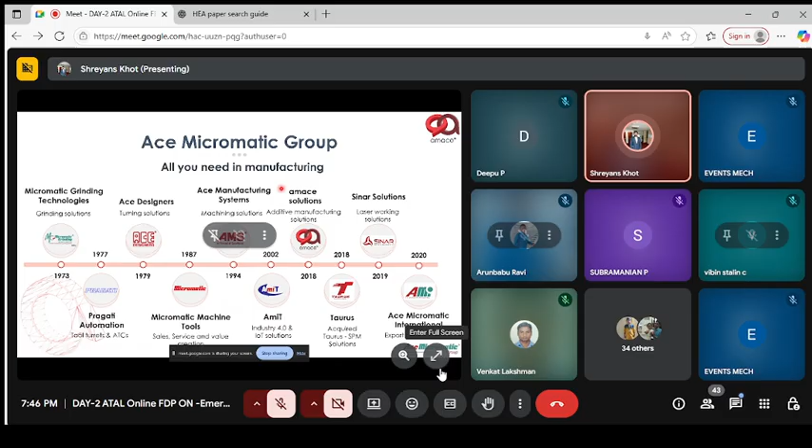In 2018, we started AMACE Solutions dedicated to making 3D printing machines. Apart from this, we have IoT and Industry 4.0 IT company, laser cutting machines, and special purpose machines - this is a glimpse of the ACE Micromatic Group, present for more than 4 decades. In 2018 we started AMACE, where two flagship companies, ACE Manufacturing System and ACE Designer, came together to form this additive manufacturing firm. In AMACE solutions, we offer end-to-end solutions starting from powder characterization, Make in India machines, printing of parts, post processing, heat treatment, and validation and certification of parts. This is our state-of-art facility in Bangalore and Pune.

So we will start with our presentation. I will give a quick introduction of this particular global AM market overview.

Everybody already knows about 3D printing, rapid prototyping, and so many other names for it. It's related to mechanical, computer, metallurgy, and chemical fields. But if we see all these things, all are covered in additive manufacturing, starting from software development, machine development, characterization - so many things are there.

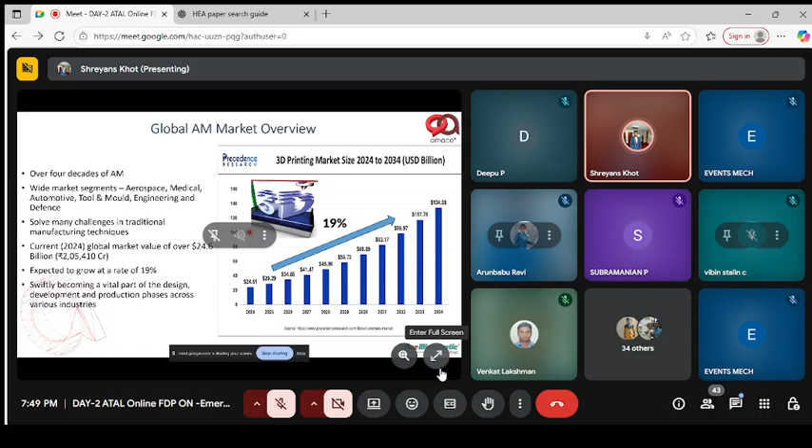So this is the current scenario in India. Currently the Indian market is close to 900 crore. But if you compare with the global market, it is very less - 0.1% or 1% of the global market.

So there's a huge demand, and everybody, starting from EV manufacturing, aerospace, space, everybody is changing for additive manufacturing. There is a huge scope for additive manufacturing. And as compared to global growth of 19%, we are growing in India at 18% year by year.

If you want to see where India is heading - there's a semiconductor industry booming, a battery industry booming, and if you see IoT and all these things, the next industry is metal 3D printing or the 3D printing industry, where everybody wants to print immediate products to take advantage of additive manufacturing.

And there are some government initiatives also started. The Ministry of Electronics and Information Technology has drafted a policy for promoting 3D printing for industrial grade as well as for education.

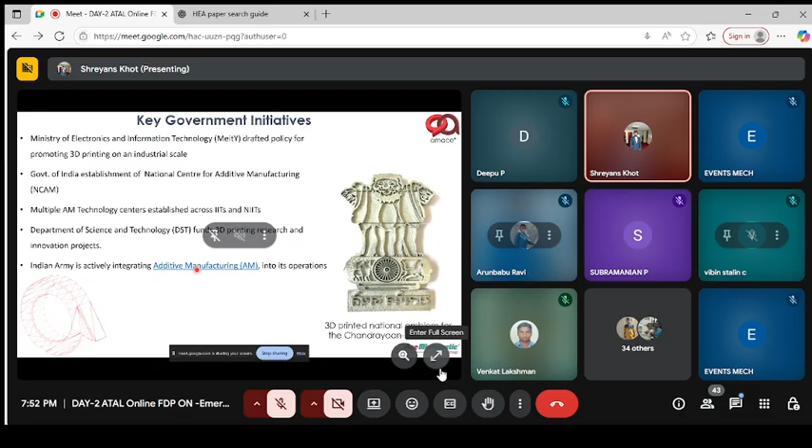So what exactly are they doing? They are doing reverse engineering of the CAD model, reverse engineering of the actual product, reverse engineering of the material itself - what are the current materials available in India, or what is the Russian grade - we are finding alternate solutions for these things. That is called reverse engineering of that particular part.

And then, everybody knows ISRO has collaborated with startups for 3D printing satellite components. If you take any startup companies like space companies - Bellatrix, Galactics, and Skyroot - almost 80 to 90% of their parts are 3D printed. And government also backed some incubator-nurtured startups developing 3D printed parts for launch vehicles.

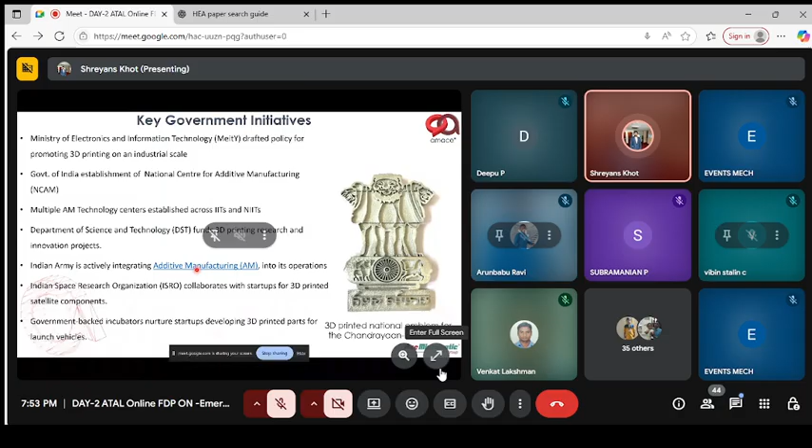So if you see, there are key government initiatives. And I will start with some basics of the current scenario of 3D printing - everybody knows all this additive manufacturing technology.

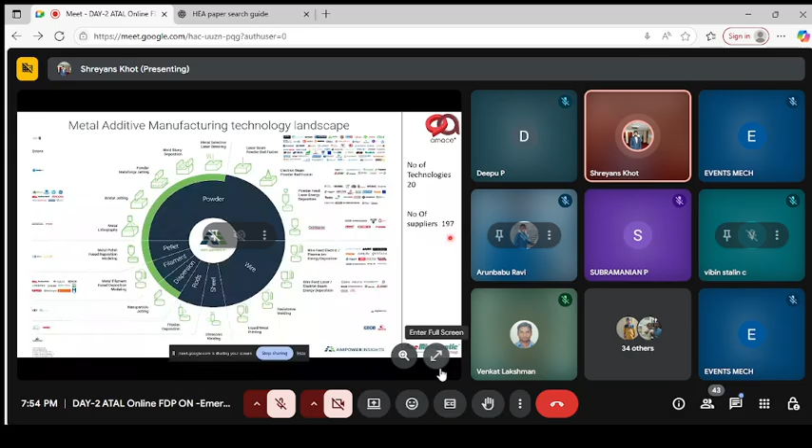Everybody knows powder bed technology, electron beam powder bed fusion, powder energy deposition, DED technology - there are around 20 technologies developed, though we commonly know only 7 to 8. Now industry is moving towards powder bed, wire bed, sheet bed, rods, dispersion, filament, and pellet extruders. More than 197 global machine tool manufacturers exist for metal additive manufacturing. This is the scenario of the metal additive manufacturing technology landscape.

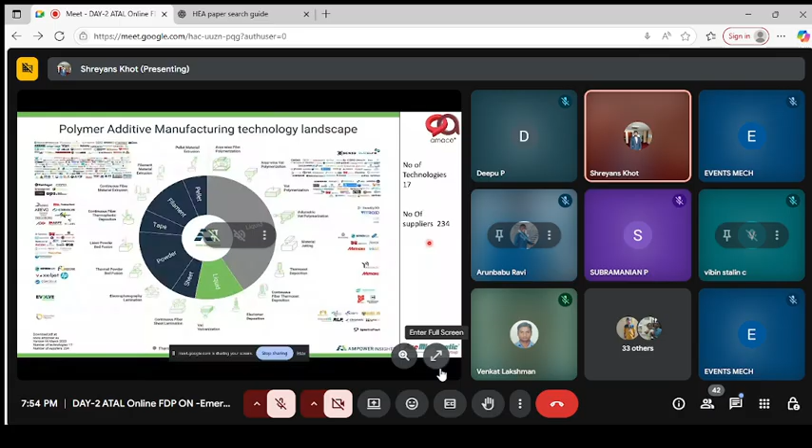For polymer, more than 17 different technologies are available for polymer additive manufacturing - I will share this presentation with you. More than 234 machine manufacturers are available for polymer. Similarly, for ceramic additive manufacturing, more than 12 technologies are available now.

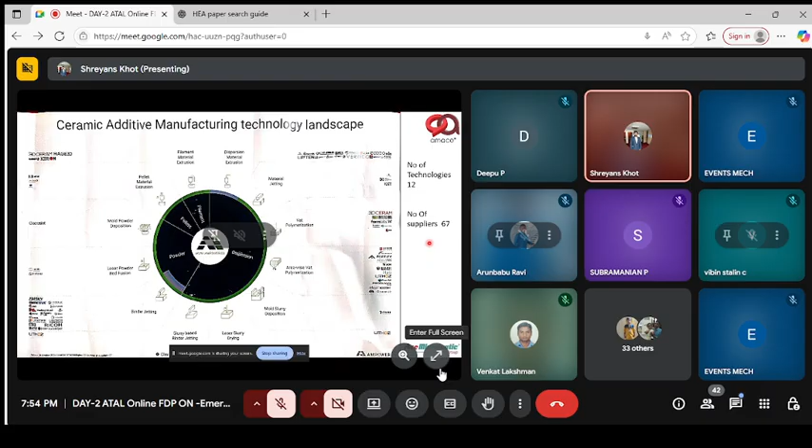I wanted to showcase the recent scenarios in additive manufacturing, and this is the current process chain. Starting with initial engineering and software, you look for the opportunity of where engineering and software fits - can I do CAD modeling or 3D printing?

There are simulation requirements too. So many softwares are available for additive manufacturing simulations, like Simufact, ANSYS, Ntopology.

What are the current designs available? Can we put lattice structures that are best suitable for additive manufacturing? There is also design for additive manufacturing - I have purposefully kept two slides for design for additive manufacturing.

This is the last slide, where I will interact with all of you, the students - what is your understanding of additive manufacturing?

If you start with engineering and software, then it comes to material - definitely powder and wires are required. What material and powders are required? Some powder manufacturing is required. What powder characterizations are required? Some metallurgical and chemical analysis are required here. Where the current material doesn't match the application, how can I chemically tweak this material so it becomes best suitable for end applications?

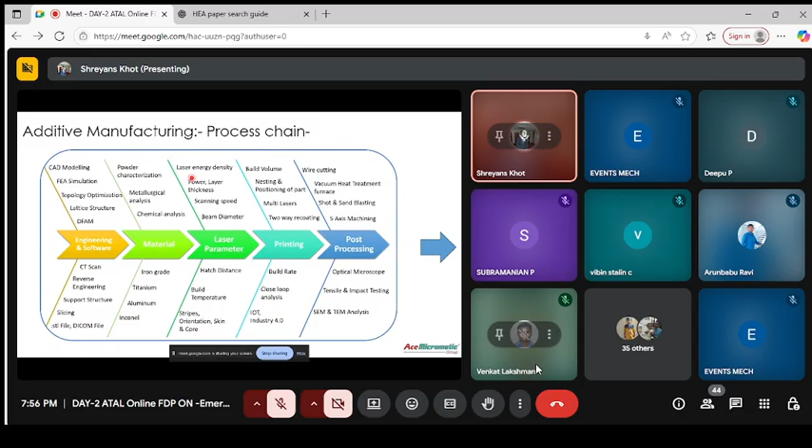And definitely this is the core subject - laser process parameters. I'm talking about powder bed technology, the most popular technology in the world and in India, where you have to play with laser energy density, power, layer thickness, scanning speed, beam diameter - apart from this is the laser parameter. More than 230 process parameters are available, and we can play with these process parameters.

By playing with this process parameter, how can I melt that particular alloy? To be frank, all weldable material available in this universe can be 3D printed. Currently, the basket is almost close to 70 to 80 materials. Someone has written that high entropy alloys are also possible - if we play with laser energy density, it's basic physics. We have to weld that particular powder, melt it, and produce a part. So we have to do all these things.

Second thing is printing - how we can print. I will not go into all these things; it is required to get hands-on experience with these printers. What are the printers? How can one single component or two different components be placed inside the build platform?

And definitely post-processing is required - we can't avoid this particular post-processing.

What are the conventional manufacturing processes there? I don't think you have gone through any additive manufacturing course in engineering itself, because in engineering what we have learned is casting, forging, fabrication, and machining. The same thing applies to additive manufacturing - if I get better mechanical properties in forging rather than casting, the same thing can be achieved in additive manufacturing by applying heat treatment to improve mechanical properties.

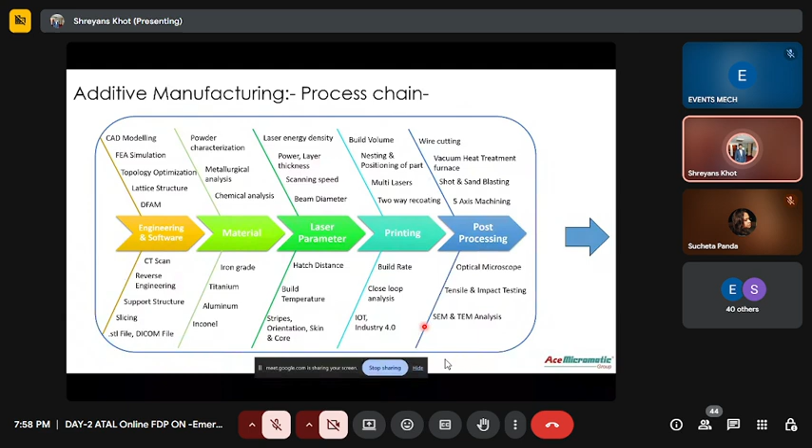Going forward, there is the qualification process. I prepared this yesterday only for this particular aerospace customer. What are the qualification processes? Definitely all the qualification processes are available for this additive manufacturing process, starting from design validations.

If you see this, I hope you can see my screen - yeah, this is the seat belt assembly.

Vinod sir, can you hear me? Yes sir, yes sir, yeah yeah yeah. Good, good, good.

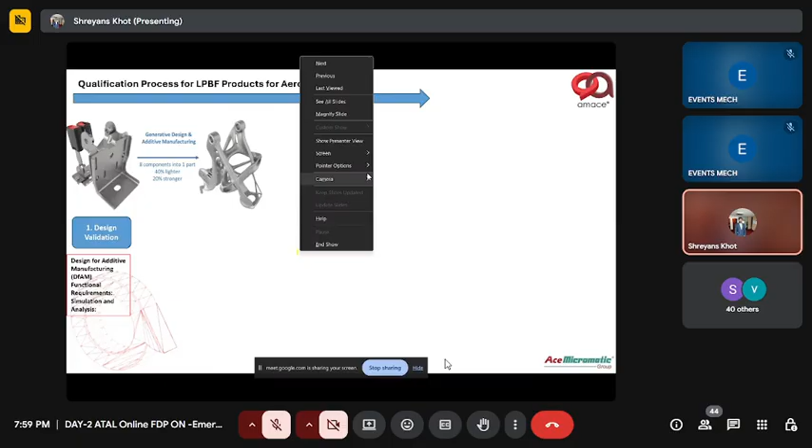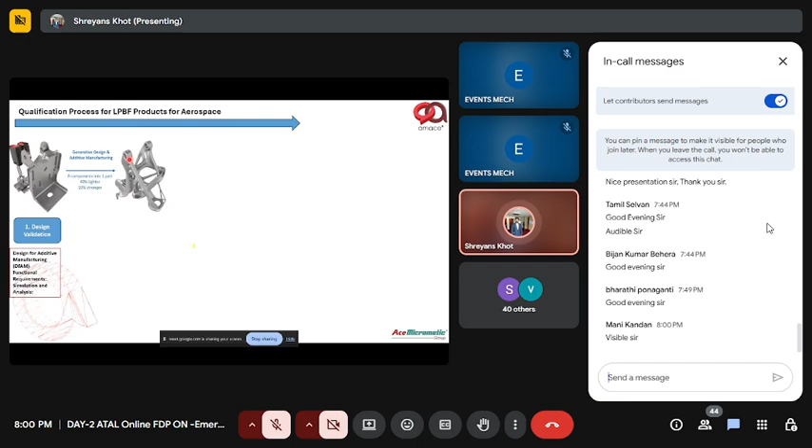So if you see this particular thing, this is the conventional seat belt assembly for the four wheeler, and it has been reduced from 8 components into 1 component, with 40% lighter and 20% stronger. It can be manufactured by additive manufacturing process only. So how are you capable to design any CAD modeling, because the manufacturing process is available, so we have to take the advantage of design for additive manufacturing.

How can you combine? If you see, these 8 components have been coming to my factory. I am working in Maruti Suzuki or any Toyota company, and we are purchasing 8 different components from 8 different suppliers. Because of any reason, one supplier has shut down his shop, the whole assembly has been stopped.

So this is called supply chain reduction. Part count reduction is there also, but independent of supplier, the supply part count of things are there. So you have to see all this particular design for additive manufacturing.

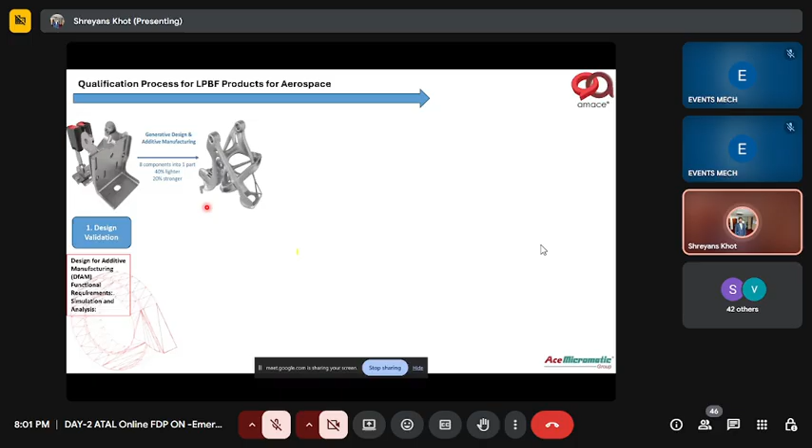Second will be material qualification. I already told you so many ASTM standards are available now for powder testing. What powder testings are there, how I can play with 20 micron to 60 micron powder for steel. Then the same shift with aluminum, I can go with 40 micron parameter, 40 micron powder particle to 100 micron powder particle size.

With this particular changing of the particle size distribution from D10 to D50 to D90, there is a huge scope available for metallurgy engineers also, where they can tweak this particular chemical composition for end applications.

There are just some challenges there. In the next few slides I will explain the challenges also for additive manufacturing. If we increase the carbon percentage from the powder particles, there is crack propagation, crack initiation coming into the picture during printing. So to avoid these things, we have to tweak this particular chemical composition for additive manufacturing, and there's huge scope available for material characterization.

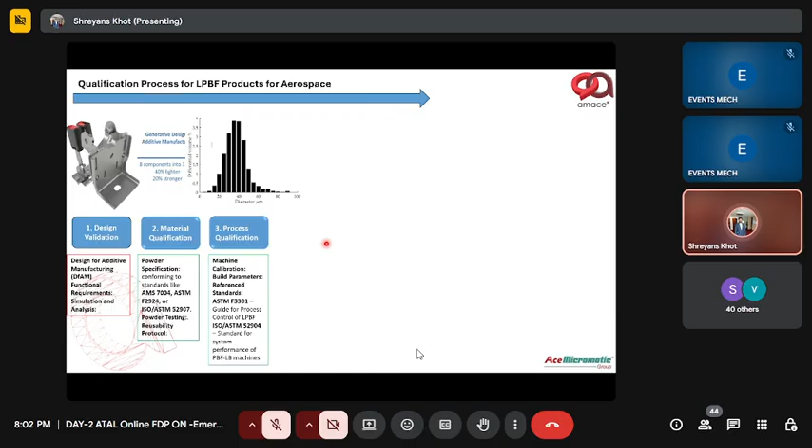Third is process qualification. Definitely the machine has to be calibrated. I will not touch this particular topic because we are hardcore machine builders. We have to follow ASTM standards to qualify this particular machine for additive manufacturing at the micron level, whatever we have to print in the micron level, we have to qualify.

Fourth will definitely be part qualification. What part have I printed in the X, Y, and Z directions? I have noticed a question about anisotropy behavior in the previous lecture, somebody asked about anisotropy behavior with X, Y, and Z direction. Definitely these anisotropies are there, but how can we avoid these particular things during heat treatment conditions?

So many heat treatments are available, and we have to qualify this particular part, printing this tensile coupon in vertical direction, horizontal direction, and 45 degree direction. As fabricated condition, what results are available? If we put this hot isostatic pressing, HIP, what will be the property? And then definitely some end heat treatment, maybe hardening, carburizing, nitriding, so many things are there according to the end application. Where I want forging high impact strength, I will go for different treatment cycles. If the rotational component for engine is required, where cycle fatigue is required, I will apply different treatment cycles. There's a part qualification process there.

And then we have to apply, as I just explained, post processing validations, and then documentation and traceability for aerospace. This is dedicated for aerospace requirements. I have to maintain one coupon. If you see, this is the build, I had to put one coupon with the date, and for aerospace, I had to maintain that particular coupon for the next 20 years during the life cycle of that particular aerospace part. This is the traceability kind of thing.

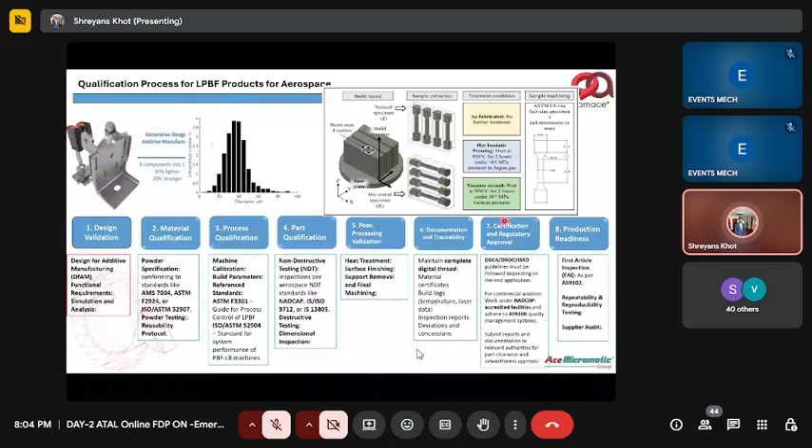And then some certifications are available now, ASTM standards are available. And if you see, Nadcap is working continuously to validate this particular aerospace and airworthiness parts also. So yesterday I prepared this slide, I will not go into detail because it is a too much complicated slide, but I wanted to highlight here, more than 98 ASTM standards are available for additive manufacturing.

If you start with the test method, what test methods are available from the material specification, starting from aluminum, AlSi10Mg, titanium, and cobalt chrome alloys. You can take any name, standards are available for the test method, starting from feedstock material, then process control, machine operation, testing and mechanical properties, and system performance. All the ASTM standards are available.

I will share these particular things. You can download and then go for qualifying IQ, OQ, and PQ: installation qualification, operational qualification, and performance qualification. This is how we can do additive manufacturing qualifications.

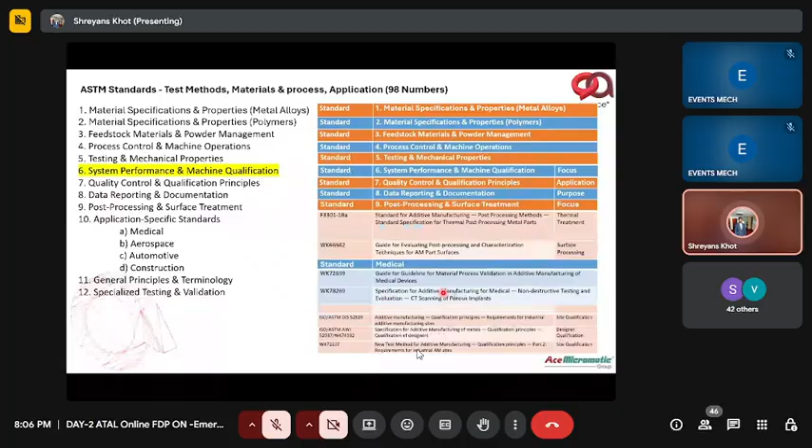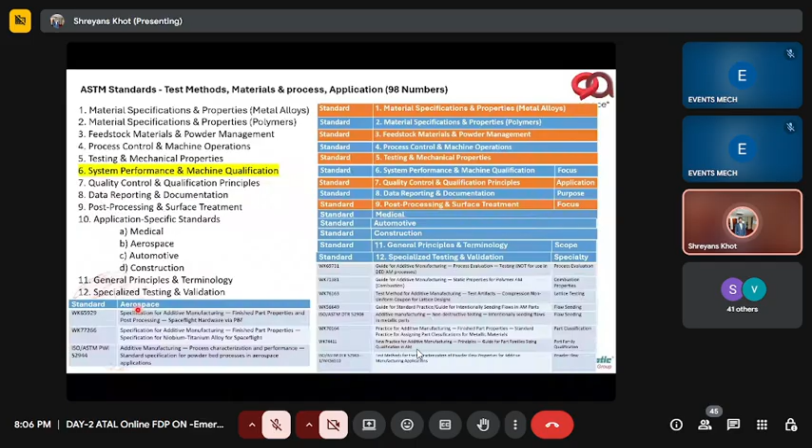There are so many other specifics for medical, automobile, construction, aerospace. This particular slide I prepared yesterday only for an aerospace company. What I want to highlight to you is go to all these ASTM standards, look at the exact requirements, how industry is following these standards and making parts. Somebody will ask about repeatability and reliability of 3D printing components, so this standard will give the answer for repeatability and reliability of these things.

Going forward, there are key challenges also available that we are facing, industry is facing. Just now I highlighted this - all the materials for powder bed are available from gas atomizer, then plasma atomizer.

In 2006 I started all this additive manufacturing, close to 19 years back. The powders were coming at 15,000 rupees per kg to 20,000 rupees per kg for SS316L, simple stainless steel 316 grade powder. All of it we were importing from outside India.

But if you see the current scenario, more than 6 to 7 Indian powder manufacturers have come into the picture. Still there are limited powders available because of the high equipment cost. Second thing is powder cost has definitely been reduced, close to 1,000 to 1,100 rupees now from 11,000 rupees. Now industry is moving towards water atomized powder.

How chips from machining can be milled and used for additive manufacturing - there are material key challenges there, and definitely there is tweaking of chemical composition, limited knowledge of applications, and limited basket also for additive manufacturing. So some challenges are there.

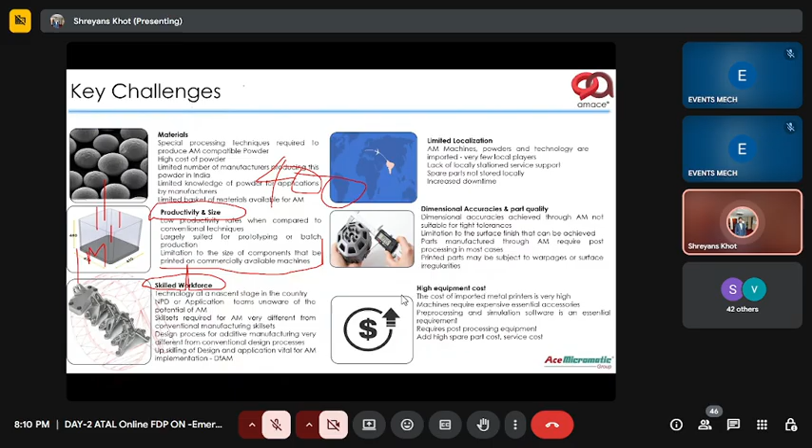Now the government, all state governments, have also taken initiatives where they have included this coursework from kindergarten itself. Now if you see, I am putting what is this 2D sketch - but there are 3D pens available where kids are putting some wire forms and making their own toys.

So the skilled workforce is definitely developing in all these things, but currently we are facing some challenges to find good application engineers. From AMACE perspective, what we are facing are challenges in good application perspective, good metallurgy perspective, good handling of ANSYS or simulation software, and definitely some marketing is also required.

But what you understand here is that complexity is freely available in additive manufacturing. The person who puts out-of-box thinking - note down my point, out-of-box thinking - who thinks out of the box, he can develop good design for additive manufacturing, putting his topology optimization, lattice structure knowledge. In the last slide I have kept two slides, we will definitely give more time to those last slides.

And definitely there are some challenges for limited localization. If you see, it has been developed by the Germans only. Now it has shifted to China, India, all these things. What are the machine manufacturers, software manufacturer, powder manufacturer, spare part manufacturer - all are limited. And definitely some challenges are there.

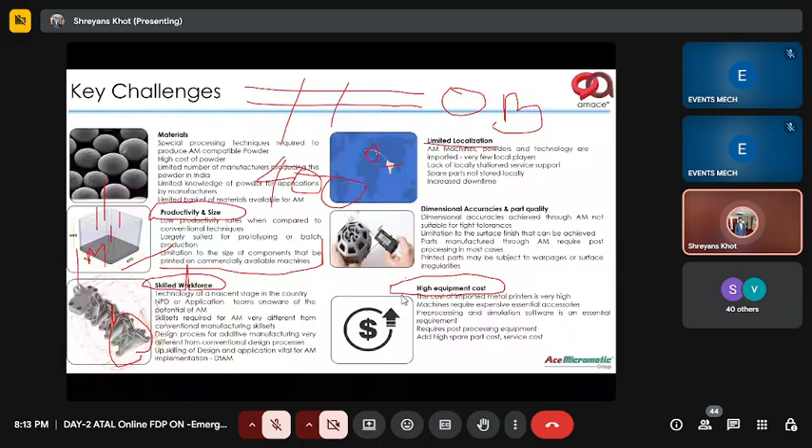Again, high equipment cost is there, but because Indian manufacturers have come into the picture, more than 70% cost has been reduced of equipment cost. Just like powder cost has been reduced, equipment cost has also reduced. If you see the calculation, the component we are producing from high equipment cost, definitely it will be higher, and that's why everybody is talking about aerospace and space industry only, because of high equipment cost and high powder cost. But because of reducing equipment cost and powder cost, it can be applicable for automobile. I will show you some automobile case studies also.

So this is the current status or development happening in India with powder bed manufacturing. I will start with some case studies from this slide.

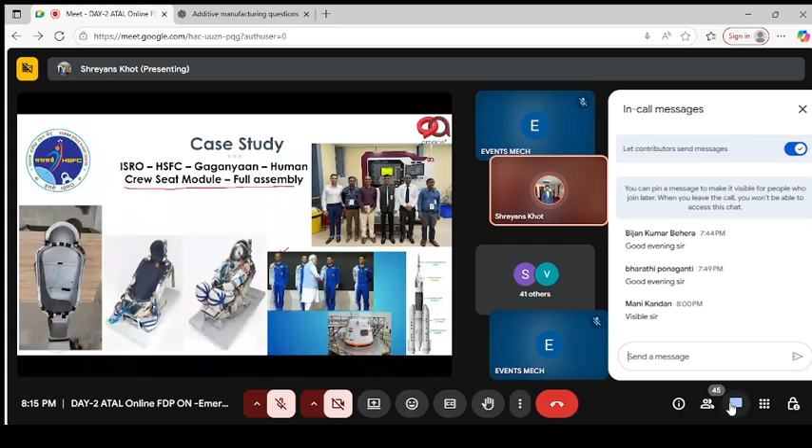Second is everybody knows the Gaganyaan mission, where four person crew members are now going for the Gaganyaan mission. If they wanted to seat this particular Gaganyaan mission, it is a crew seat bracket we have printed - 3D printed. Previously they had conventional manufacturing. Nobody knows how they could manufacture all these particular things by conventional manufacturing. There are so many challenges, and the lead time required for these things - they had 1 year for the conventional sheet metal manufacturing.

We split this particular crew seat into 8 to 9 parts. We printed the big parts successfully, and assembled them - if you see, this is the crew seat bracket. More than 7 to 8 crew seat brackets, now supplied to HSFC, ISRO for the Gaganyaan mission. This is our AMACE SLM machine where we printed this particular crew seat bracket.

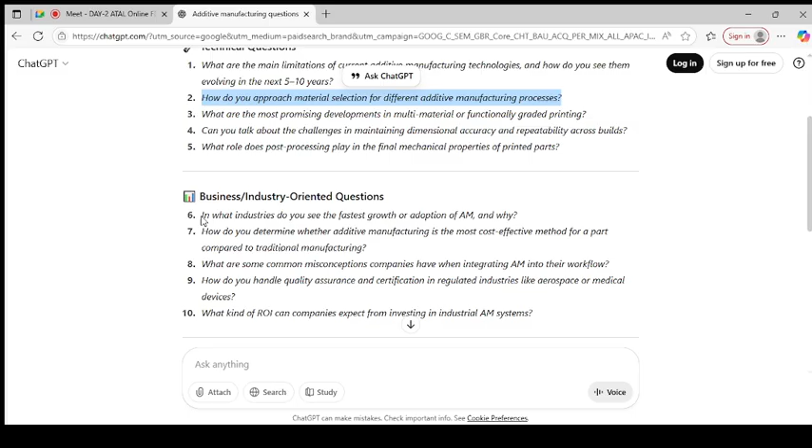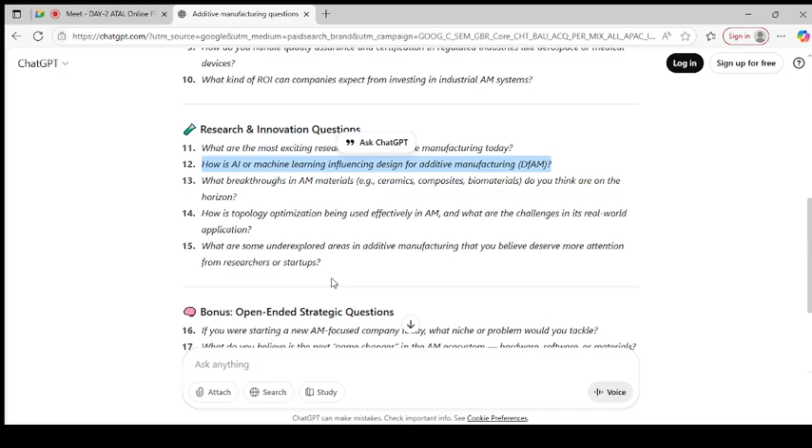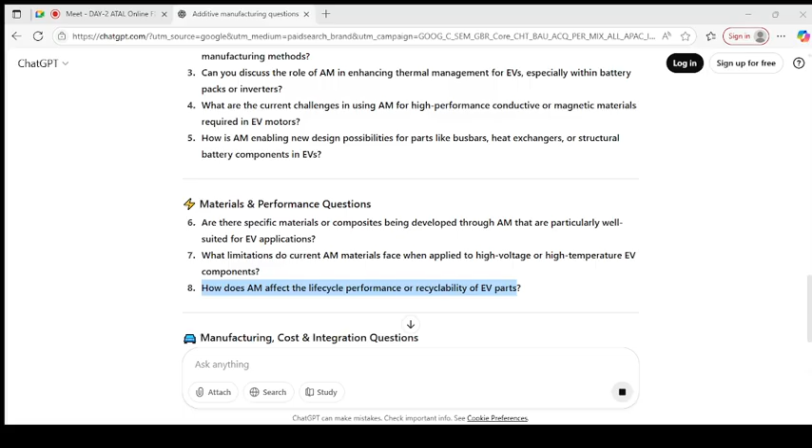But it went for the Bharatmala trip, starting from Bangalore, going to extreme cold conditions and extreme hot conditions, and they even set a Guinness record going up to 14,000 feet. Why am I highlighting all these things? The 3D printed parts are now continuously used in these actual use conditions, rather than just aerospace and space.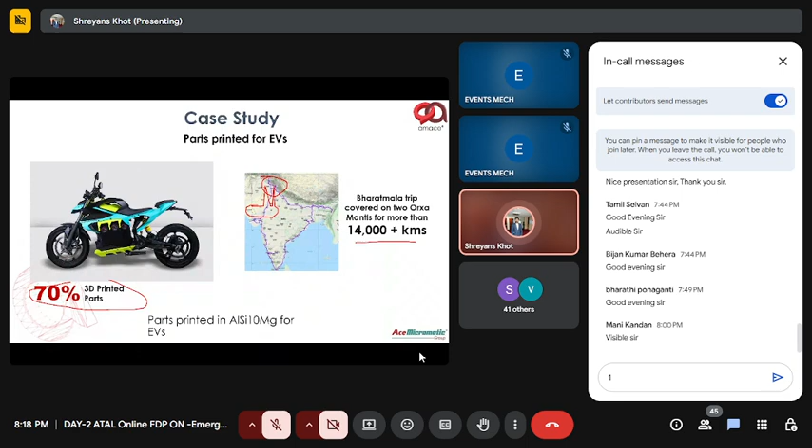We have even modified some design. We have removed some weight in one single plate. 5 plates we have printed, and we are continuously supplying these additive manufacturing cold plates to industry.

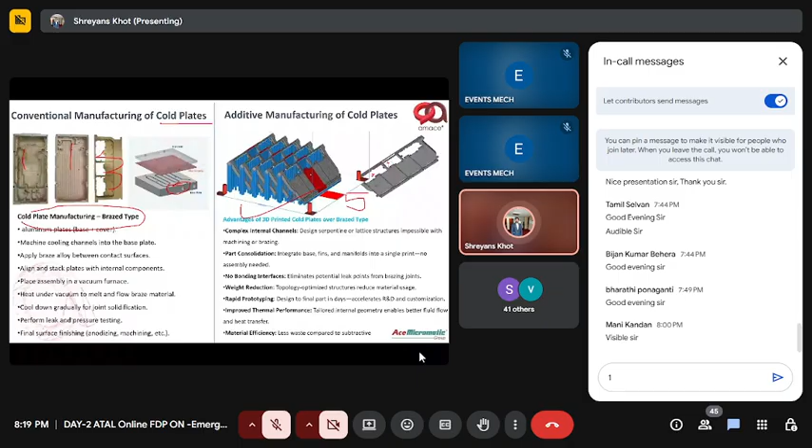300 micron holes are there for the fuels. 300 micron size. It cannot be possible by conventional manufacturing.

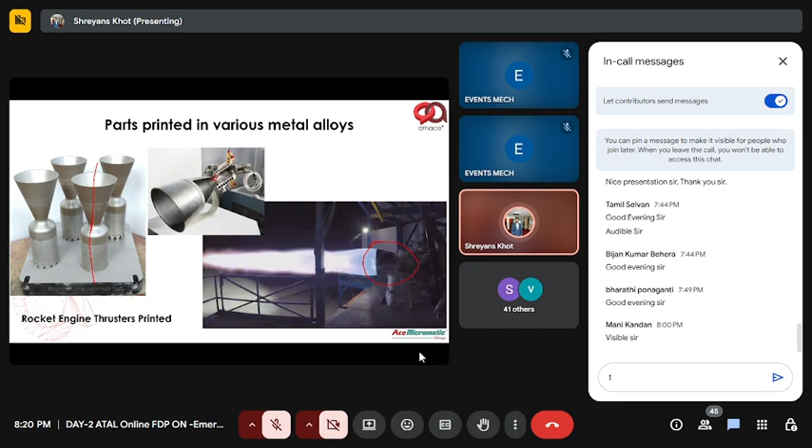They have eroded. What are they doing? All these blades are 3D printed and placed here, and they are using them for power generation and energy applications. The same aerospace engine they are using for power generation applications.

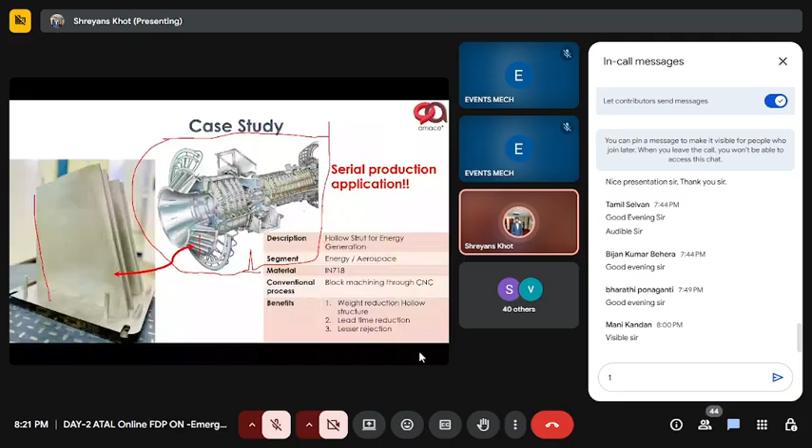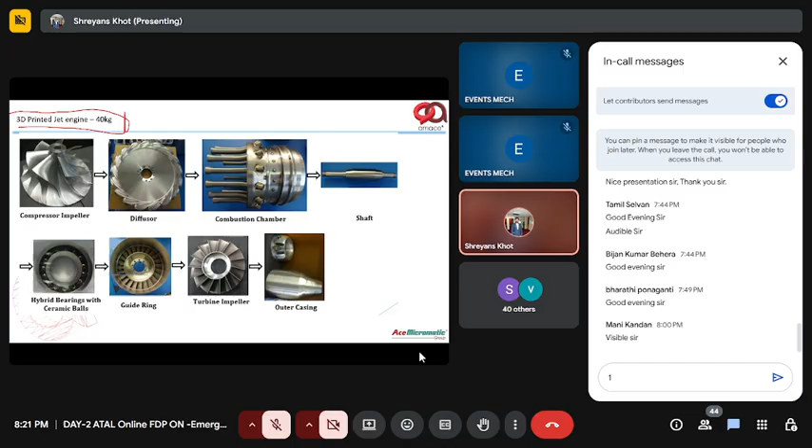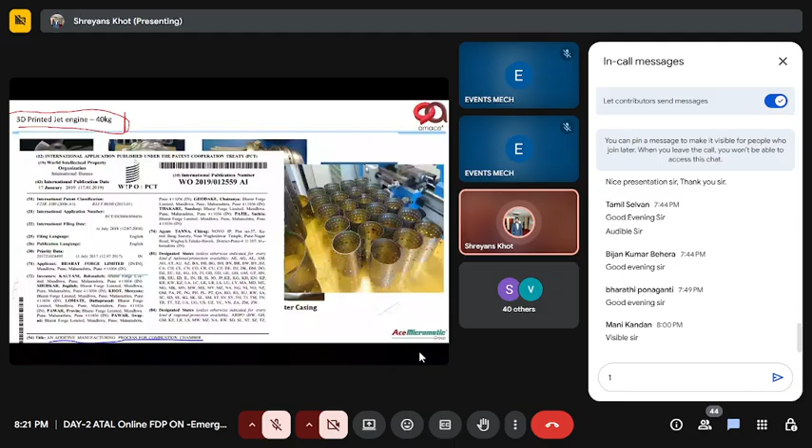This is my own case study, where a 3D printed jet engine - a 40 kg thrust jet engine - we printed in my previous organization, where all these particular components we printed. We have also filed a patent, and it has been granted. So this jet engine is also there for drone applications. So many applications are there. We have printed small versions and successfully tested them also.

Another case study is there. If you see all the lattice structure designs, what lattice structure designs are available - the URSC satellite center came to us for this particular bracket.

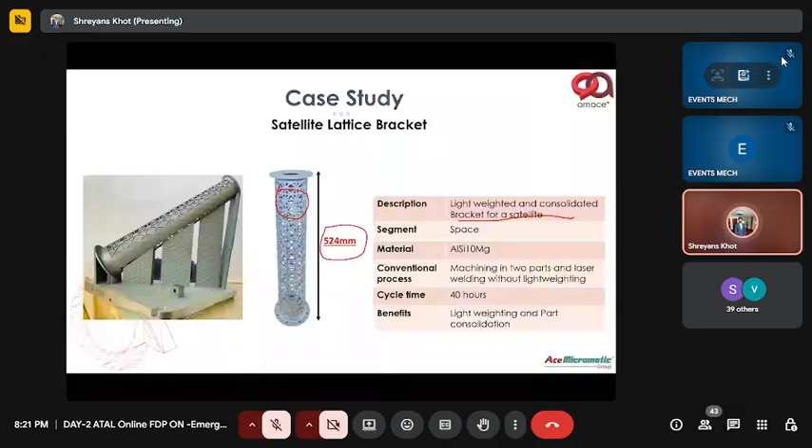If you see, it is 524 height, but our bed size is only 400 by 400 by 400. So we have diagonally placed these particular things. We have given dummy walls - if you see, these are dummy walls of 200 microns. It can be made possible by additive manufacturing to hold these particular structures.

It is a very delicate structure available. So we printed it, removed the supports, and successfully printed these components where no dimensional limits are available.

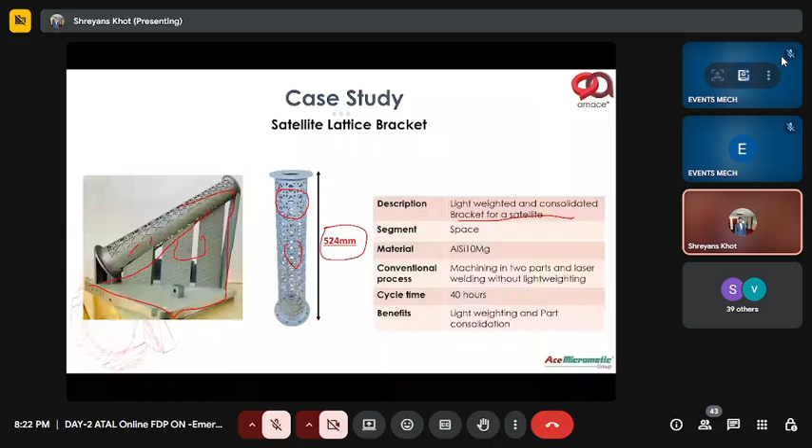This is another case study. Why am I showing different case studies? Because different applications are there.

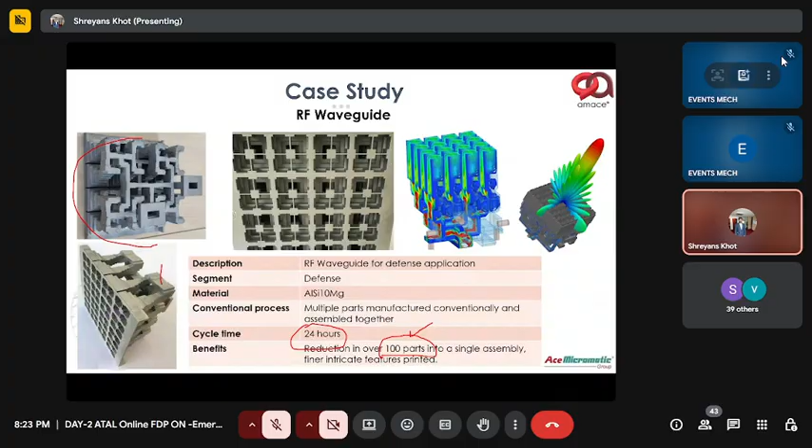We printed it in less than 24 hours, reducing 100 parts into one single assembly, and we successfully printed this for the RF waveguide. It is a defense application where radar signals are sensed.

This is again a part validation for space applications, where it is going for NAL and URSC applications.

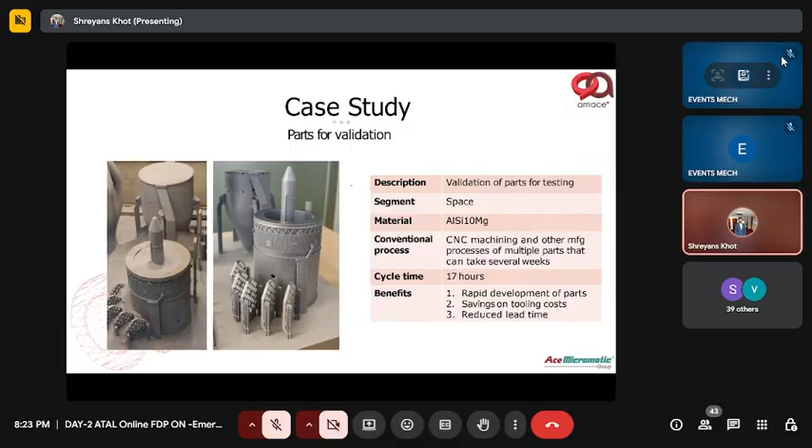Same thing - collimator we have printed. If you see, along the 110 length, it is a 300 micron wall. All these walls are there, 300 microns. This can be made possible by additive manufacturing.

Now the question comes into picture - is it a conventional design or have we modified it? The good thing is, as per the 3D printing requirement, we have modified these particular walls for 3D printing applications. And if you see, something is there to hold this particular part during printing - we have given some supports, antenna supports, all these things by 3D printing.

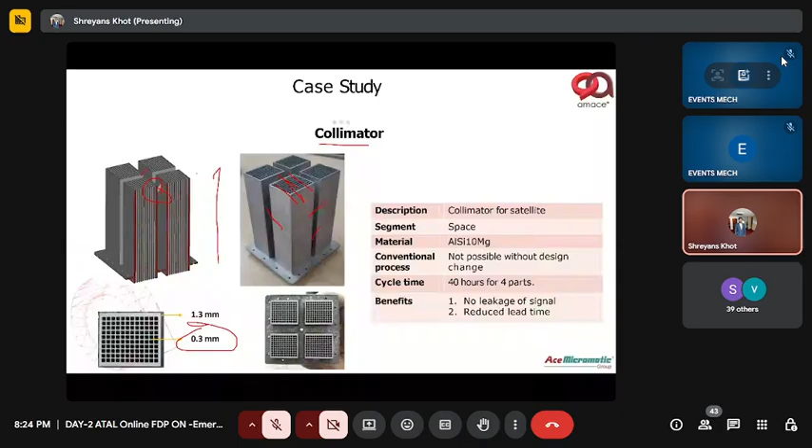And recently, everybody knows this particular Chandrayaan mission - Chandrayaan 2 also and Chandrayaan 3 also. If you see, what is this? The national emblem of India. It was at the 11th hour that URSC took the decision to print these particular things.

I will run this particular video.

If you see, this is a rover. Once it has been landed on the moon, in the wheels they have given this national emblem and Indian logo, 3D printed, and it went to now moon missions. So we proudly say that 3D printed parts by AMACE are on the moon now. So there is no limit for this thinking of design for additive manufacturing.

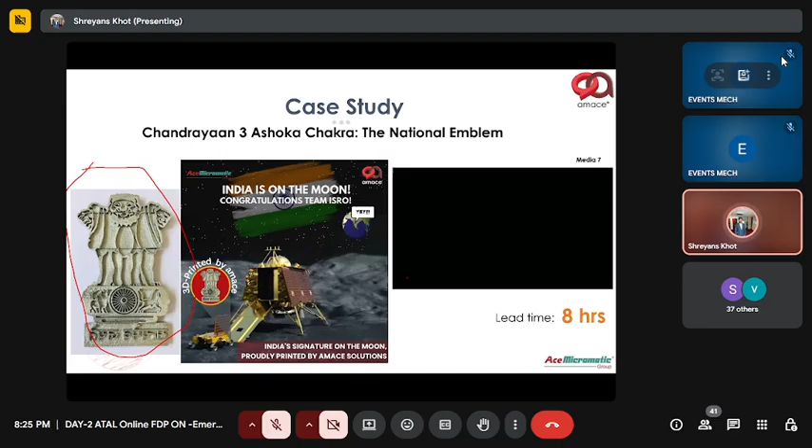Now the question will come about these particular things. All I can showcase is space, aerospace, automobiles, but there are die and mould industries too. This is a battery casing for four-wheeler manufacturing. You can see this is the end component of the battery casing.

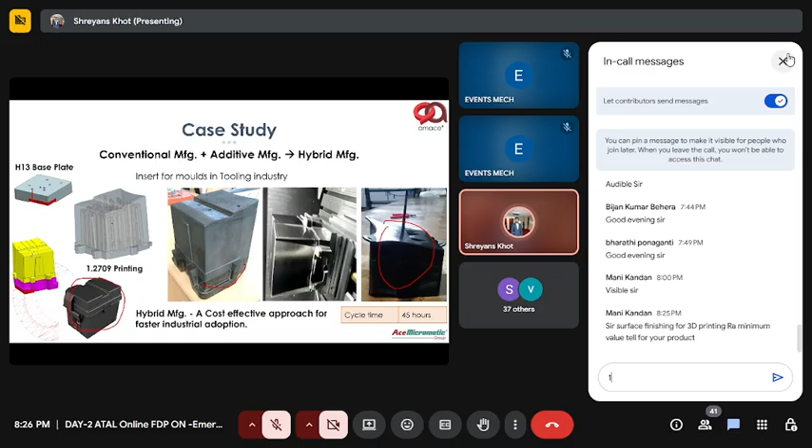And this, if you see, this is the H13 base plate, a die. This is a plastic injection molding die where in this die plastic injection molding will come, and this is the final product. For this H13 there are conventional straight holes. We have printed on maraging steel, called hybrid manufacturing, where H13 has high thermal conductivity and maraging steel has high impact strength and high toughness. So we have printed a combination of these particular things.

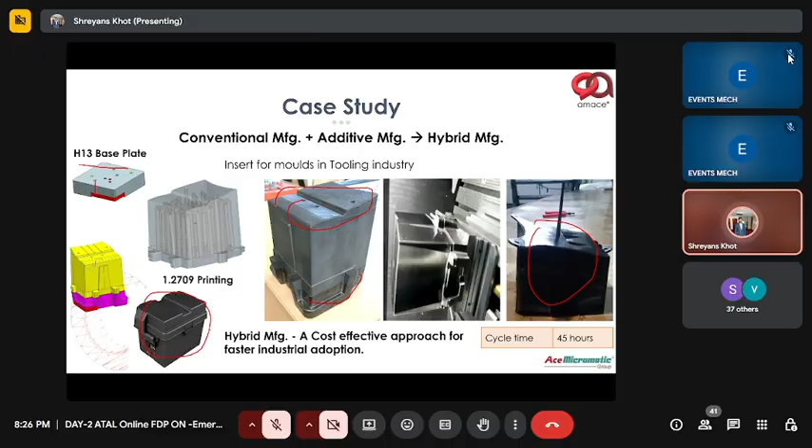Now the question will come, why H13 and maraging steel? There are plastic injection molding dies with high wear and tear, and if you see, the plastic takes the top of this piece. So how to control this? We have to modify the design. This is the straight holes, but if you see, these are curvilinear holes along all these things. So the plastic will rapidly solidify because of that die, giving a clear advantage.

For additive manufacturing, after this printing, if you do the 5-axis machining, you can see there are no gaps. Cycle time is 45 hours to print all these particular things.

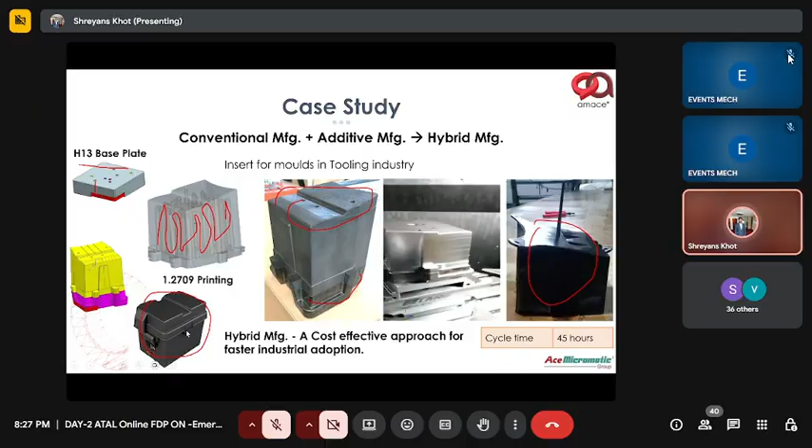Now I can show the acceptability of additive manufacturing, or use of additive manufacturing. Everybody knows these particular tires, four-wheeler tires. What do four-wheeler tires have? There are serrations on all four-wheeler tires. This is called sipes.

For the tire mold applications, we are printing millions and millions. Every month we are printing 10 lakh sipes for this particular tire industry. Take any tire industry's molds, we are printing these sipes. This has been modified manufacturing by additive manufacturing. If you go for conventional manufacturing process, the lead time is close to 1.5 months. Within 8 hours we have printed these, and we put them in the tire molds. Inside the tire molds we put these sipes, then they pour the rubber, and this serration comes out.

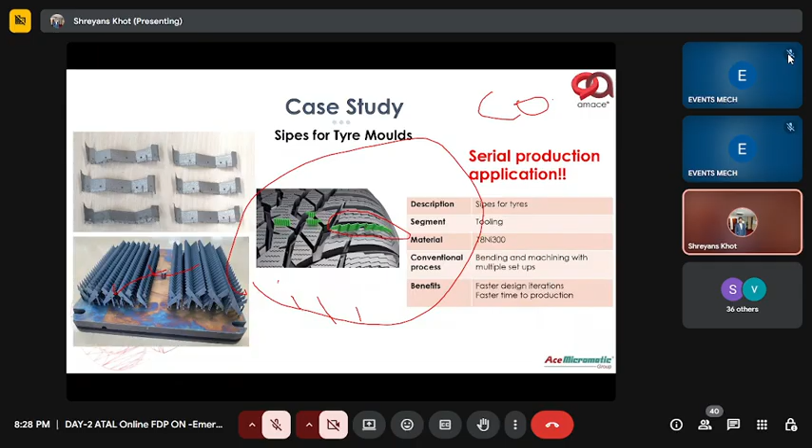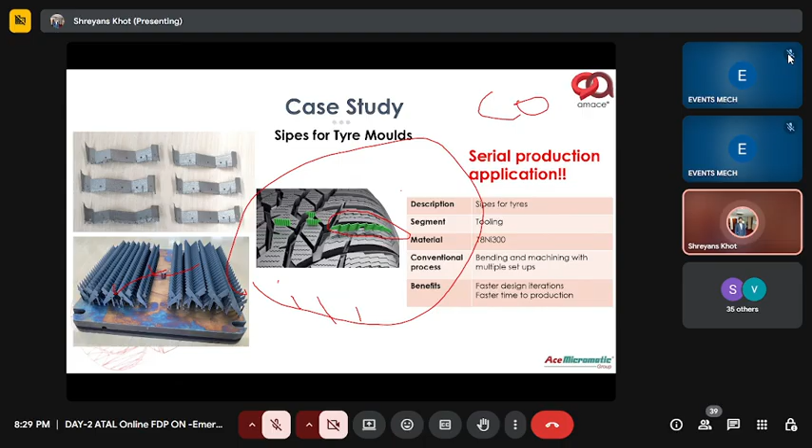Now the question will come about cost. Definitely, comparing to conventional manufacturing, we have achieved the break-even point, and it is 20 to 25% cheaper than the conventional manufacturing process. So all tire industries, all dental copings, dental caps, knee joints and hip joints, now 90 to 100% have been printed by additive manufacturing process only. This is now the standard process to manufacture this part, an additive manufacturing process.

So in between, this has come. Okay, so these are the three machines. Currently what AMACE is offering is dia STLR 120, STLR 180, and 400. But as I've explained, I can easily convert the 400 machine into dia 120 machines. So these are the three sizes available from AMACE Solutions.

It is a single phase STLR 120. More than 6 to 7 IITs or NITs have installed this, and this industry also uses STLR 400, which is industrial grade. We are now moving to bigger platform size machines also, with 2 laser, 4 laser, and 6 laser configurations.

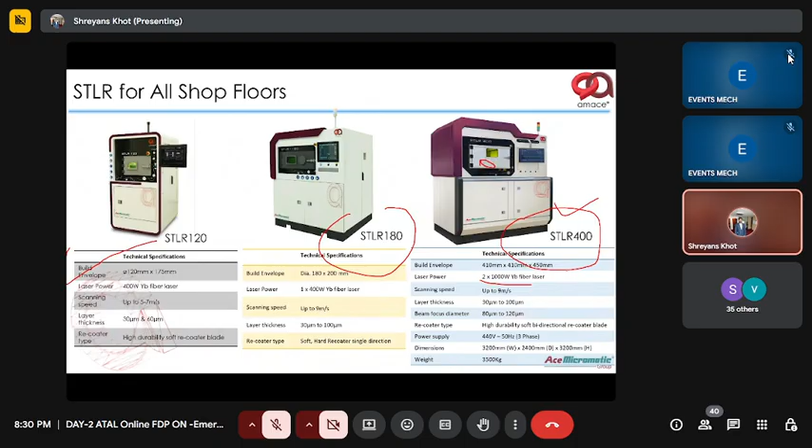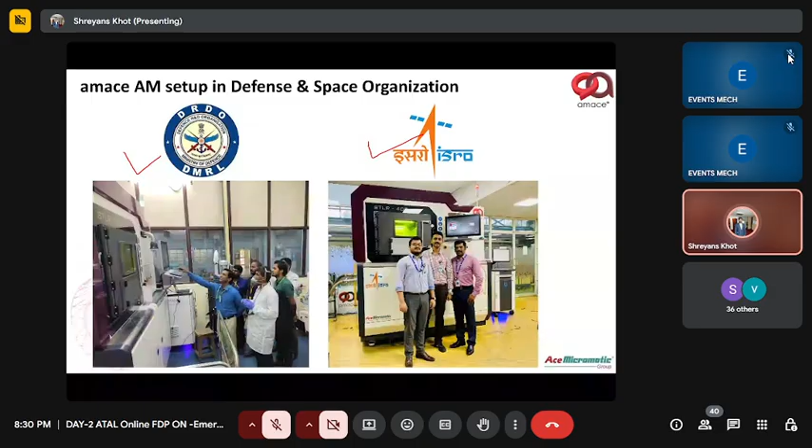So these are our installations: DMRL and ISRO. We have done installations at all these places, and also installed at Manipal, IISc, IIT Bhilai, IIT Kharagpur, MCB Military College, and NCAM, National Centre for Additive Manufacturing.

So this is my last slide. I have kept another 2 slides. Now what you can see here, I can minimize this for the time being.

The second thing is the baby shower cap. You can see how it has been designed. Nobody thinks about these particular things - how effectively we can design these things. It is called out of box thinking.

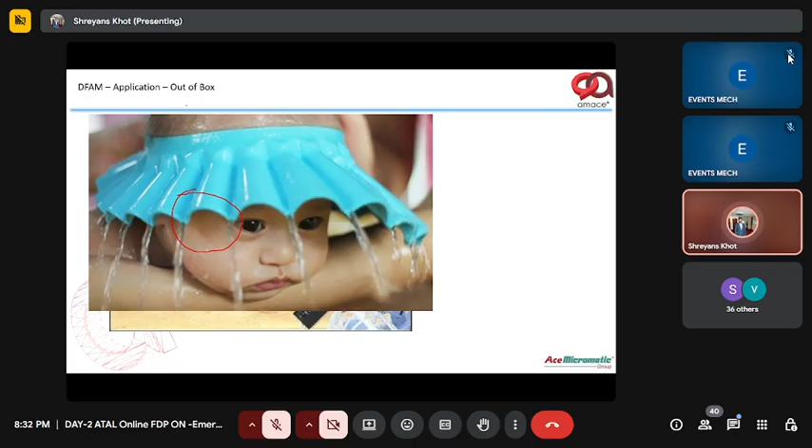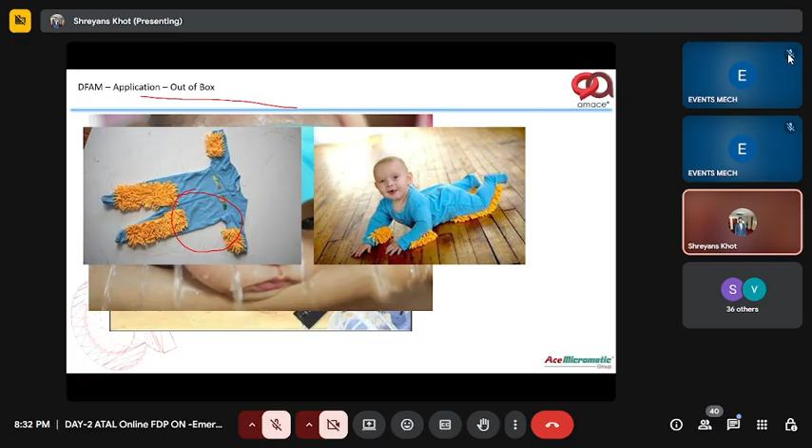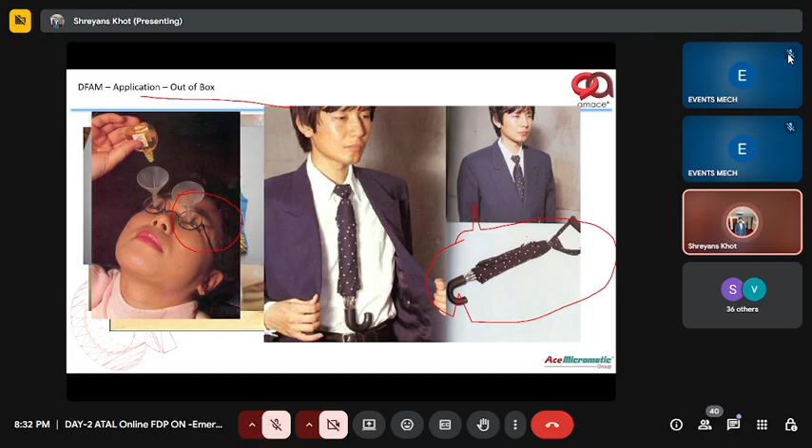Third is - oh babies wearing, what is this, a floor mat? Floor cleaning? Yes, this is worn, so it has multiple use. Same thing - eye drop, and all these things. You can see it's a tie, umbrella, multiple use. The person is carrying the babies with the modification of current design.

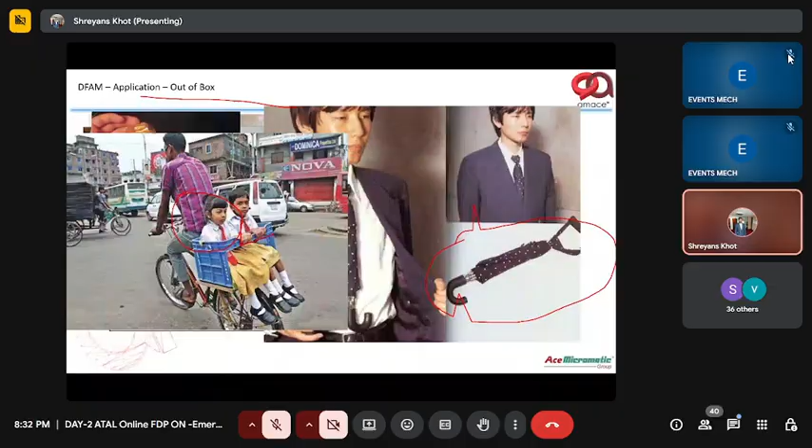What to highlight is modification of current design, or out of box design - how you wanted to modify the current design with additive manufacturing.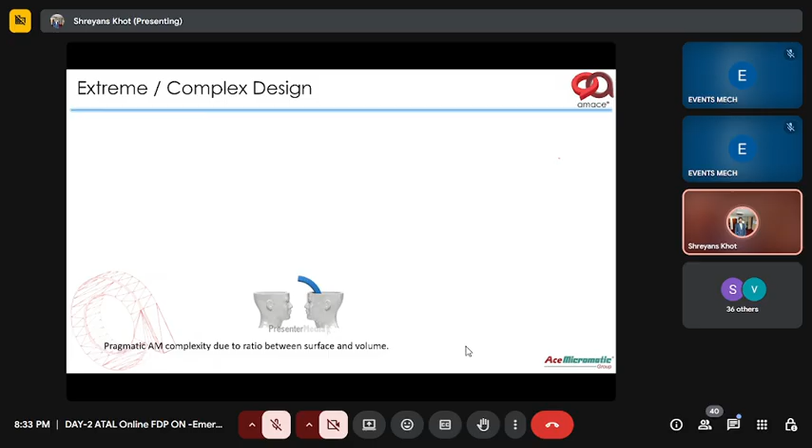So this is my last slide. I just wanted to give some small things for industry requirements. I have to hard stop by 8:45 - I have another call at 9 o'clock, so I will keep 10 minutes for question and answer. So listen carefully, this is the last slide for this meeting.

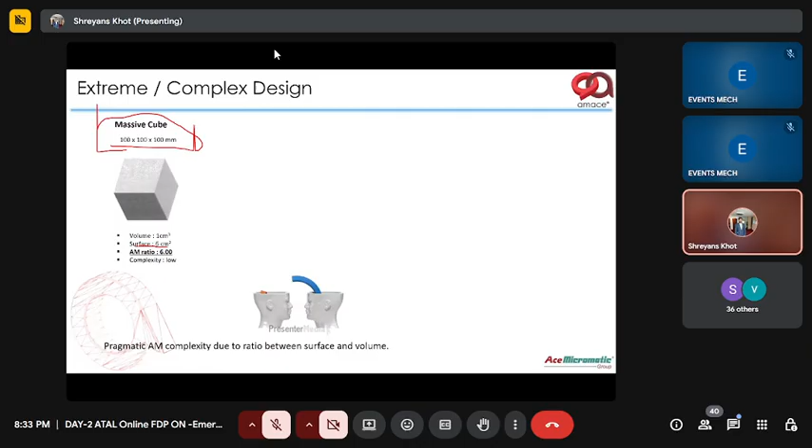If you see, this is a 100mm by 100mm by 100mm cube. You are all engineers - what can you do for manufacturing? Either go for machining, casting, or fabrication. But if you see, the volume is 1 centimeter cube and surface is 6 centimeter square. Can it go for additive manufacturing? No.

So if I put some holes in this particular cube, the volume to surface ratio has increased to 25.78. Then the operations - I have to drill 54 holes by drilling operation, milling operation. Two operations have increased, so lead time has increased.

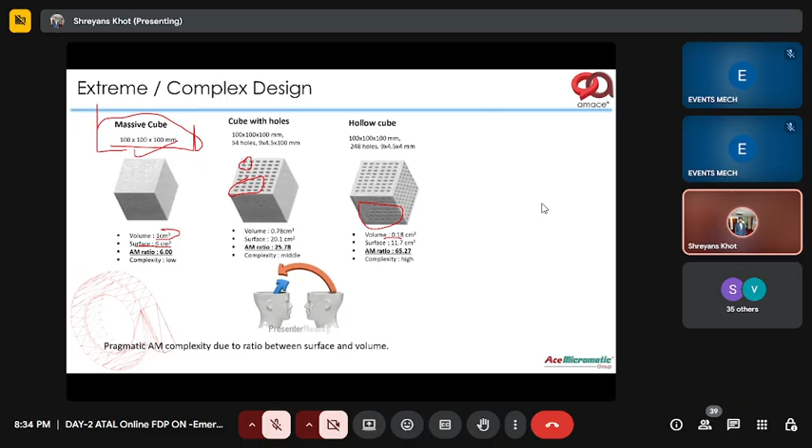Then if I put some hollow inside this, on one side, the volume has decreased from 1 centimeter cube to 0.18, but the surface has increased. The complexity has increased. Then closed hollow - so what I wanted to highlight here,

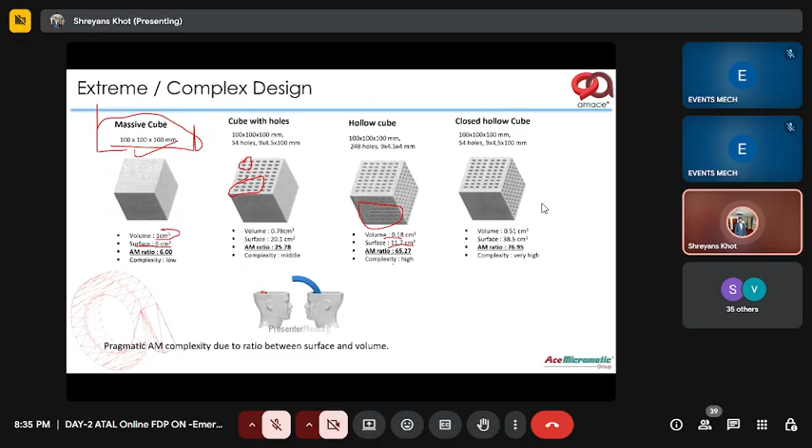what topology optimization tools are available? You can note down - nTopology is available for education license. Autodesk, AutoFab, Netfabb are available for education free of cost. You start putting what GrabCAD models are available, how I can add complexity, how I can do topology optimization, how I can put the lattice structures to be best suitable for additive manufacturing.

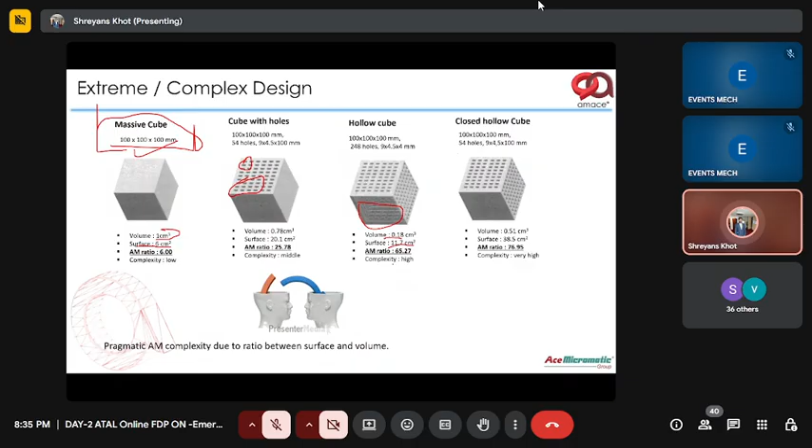Because for conventional manufacturing design, if I take a simple day to day life example - mouse, laptop - it has been manufactured by conventional manufacturing. How you think about out of box thinking will make it best suitable for industry. Conventional manufacturing definitely brings cost into picture, and there's an established process. How can we utilize this particular design for additive manufacturing.

Some case studies are there, but I will not go into this particular thing.

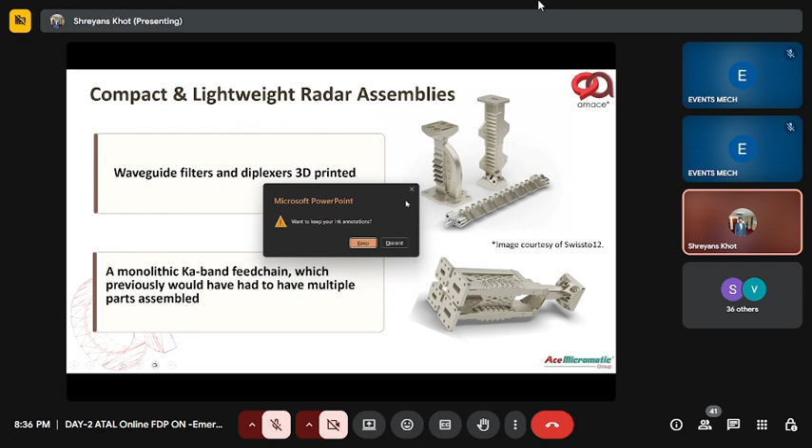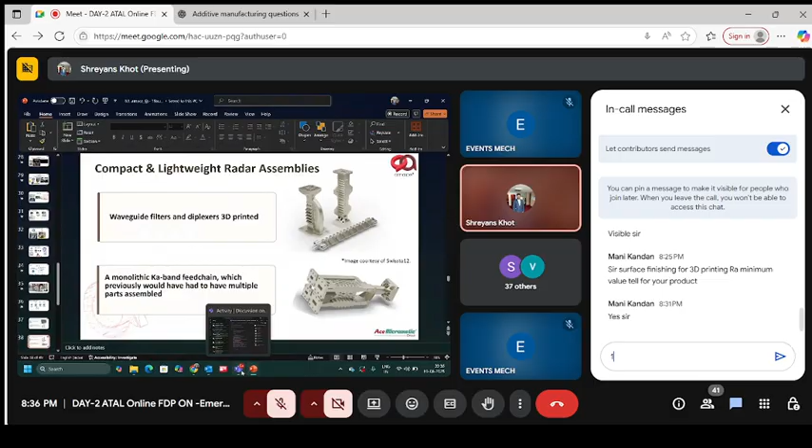So I will stop this particular slide, and then - where are we? Okay, I will stop this, and then come back here. So I will turn on my camera also.

Hope I am visible, I can see all of you. Can you see me? No sir, your camera is not visible, sir. Oh, is it? Something is there. Okay, let it be. Yes sir, now you are visible, sir. Okay, so I have purposefully now-

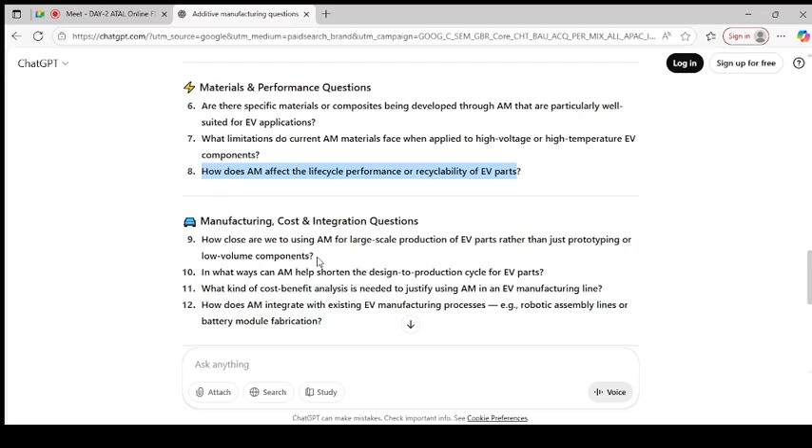Something is cooking with functionally graded material and DED technology. DED means where wire and powder are put in at the top, and with the nozzle it is melting and printing - that is functionally graded material. We are doing this for aerospace applications where the end application requires it, and also multi-material, putting niobium into inconel and adding something there. I can't disclose this particular end application, but there are a few hundred papers available with universities - you can check.

Eighth question is: how does AM affect the life cycle performance?

I think I have shared one particular case study, the EV bike. Apart from this, I will take the example of Mahindra Bolero. They are launching the Mahindra Bolero EV, and they have checked the recyclability and repeatability also. For this end customer, Mahindra, we have printed more than 6 to 7 parts, and there are definitely life cycle performance considerations.

I will go to the next question: 3D printing minimum diameter for a micro hole. So we have printed a 300 micron size hole.